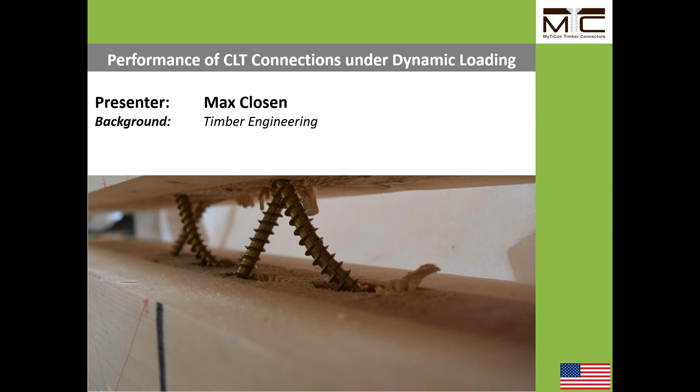Right now we are still engaged in some research projects that involve CLTs, and part of this involvement will be presented today in the webinar. So we will basically have a refresher on the performance of CLT connections under static loading, which was presented earlier in 2015. The webinar is still on our website, and the slides as well, and the design guide. So if you want to take a look at these pieces of literature later, you are welcome to join the website and take a look at those.

Today we are focusing on the performance of CLT connections under cyclic loading, after the research project at UBC here in Vancouver was completed. Lastly, we'll provide a summary of the proposed design procedures and design values.

The first campaign was on static loading. We investigated the capacities of panel-to-panel connections, such as surface spline, half-lapped, and butt joints. In the second campaign, we looked at the cyclic performance of these systems, again in panel-to-panel connections: surface spline, half-lap, butt joints, and so on.

And lastly, we will take a look at the data, the results that we obtained, some of the statistics we want to present, like drops in capacities between static and dynamic loading, how load displacement curves look, ductility estimates, capacity estimates, failure modes, and so on.

As usual, we want to put a disclaimer on the information provided here. The webinar is for informational purposes only. This is because we have only done small test series here, of 3 replicates or 6 replicates, depending on the series. However, we do strongly believe that we can use this test data to verify existing or future code provisions in CLT connection design through this small sample test series.

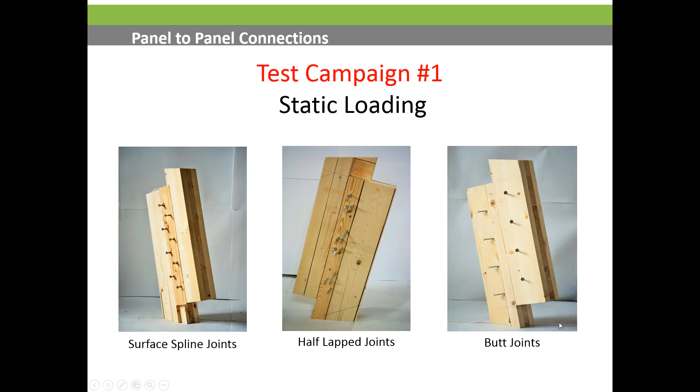Test campaign number 1, static loading. As mentioned before, we focused on surface spline joints, half-lap joints with a variety of fastener layouts, and also butt joints with a variety of fastener layouts.

Surface spline, half-lap joints, and butt joints are all listed here to the left-hand side. The label SS is basically surface spline, in a 3-ply panel with 90-degree screws. LJ is lap joints—a whole bunch of different lap joints were tested—and BJ is butt joints.

We have a variety of different angles: 90-degree angles, 45-degree angles, a combination of 45 and 90-degree screws, and also compound angles of 33 and 45 degrees in one specimen. A variety of different numbers of screws were used, ranging between 8 and 12 screws per specimen. This is basically determined by the spacing and edge distance requirements that we used for the specimen.

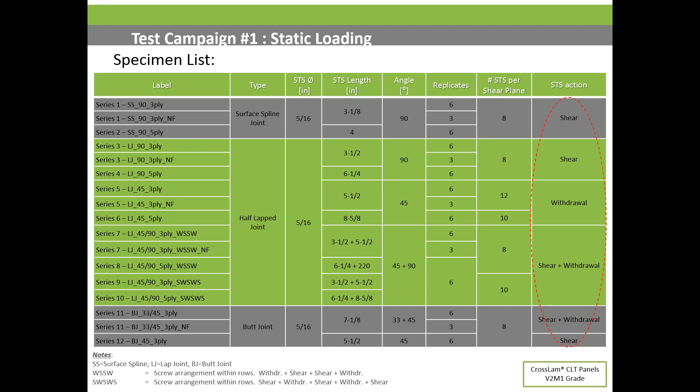We have used fasteners in shear, fasteners in withdrawal application, and interestingly, with results we'll see a little bit later, we have used fasteners in shear and withdrawal combined action. All tests were performed in cross-lam CLT panels, V2 M1 grade, from a local manufacturer here in British Columbia.

Our test setup was selected according to DIN standard 26891, which is basically an actuator pushing down onto our specimen. The specimen is at a small, about 15-degree angle, to subject the fasteners to a pure shear load. In our loading protocol, we load the connection up to 40% of its ultimate expected load, then unload the specimen to about 10% of its expected load, and then ultimately break the specimen until ultimate failure occurs.

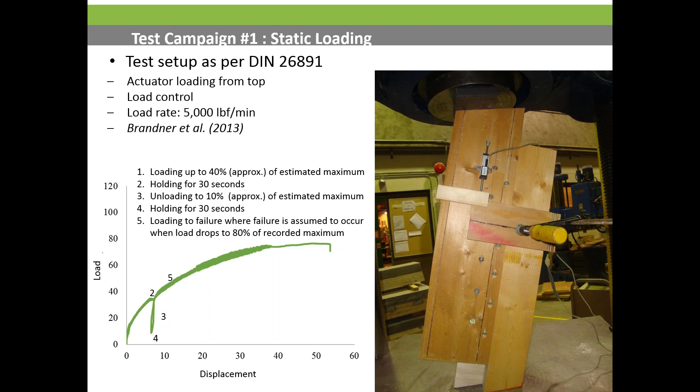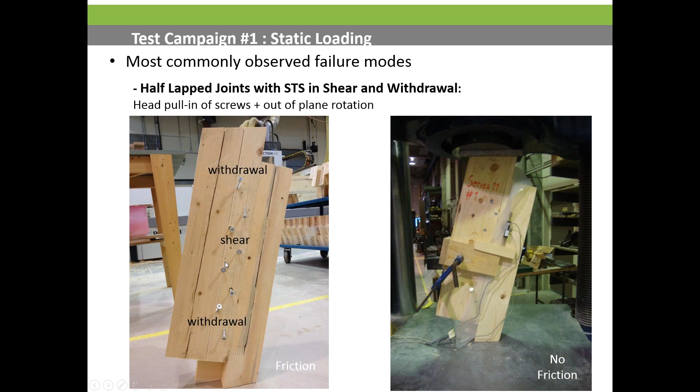For the joints where we have half-lapped panels, that was on one hand fasteners in shear, on the other hand fasteners in withdrawal. We have fasteners in withdrawal on the outside, fasteners in shear on the inside, and then again withdrawal on the outside. Failure modes that we saw here are again head push-out, head pull-in, fastener bending, splitting of the wood fiber, and out-of-plane rotation for some of the specimen.

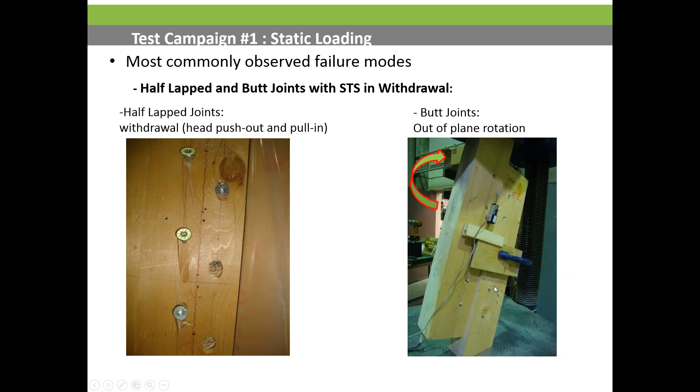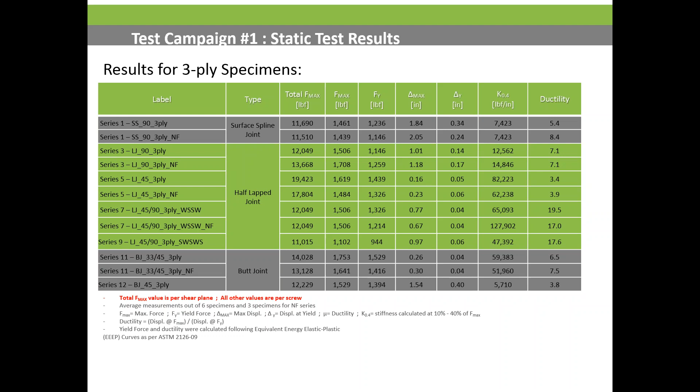In this table here, we present a summary of all test results. There is a lot of numbers presented here, which we will not go into detail now in this webinar. However, you're welcome to take a look at these slides after the webinar. I'm pretty sure these slides are going to be sent to you by email today or tomorrow if you have registered for the webinar, and you can have a look at these capacities, yield modes, ultimate displacements at yield of the fasteners, and stiffnesses and estimated ductility values of the systems.

One particular mention that we want to do is we have basically looked at connection layouts with friction, and then the NF specimen is without friction, no friction in the specimen. To do that, we basically have placed a non-friction layer or barrier in the shear plane that is meant to reduce the friction. However, what we do see as an impact here is there's no real significant impact for specimen that have friction and specimen that have no friction throughout the entire test series.

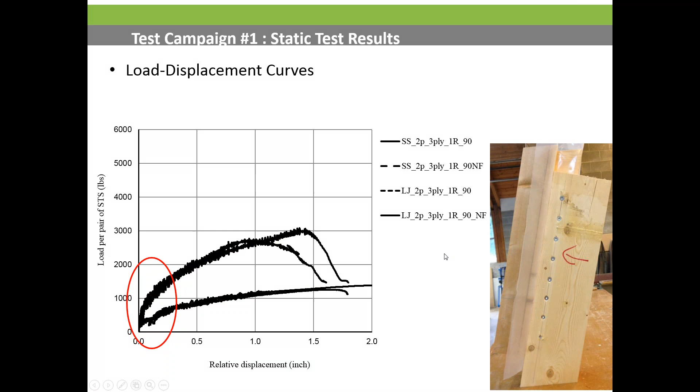The third test setup is fasteners in tension action. So we are placing the fasteners at a 45-degree angle to the force application, subjecting the fastener to a tension force. For these applications, we use fully threaded wood screws. I will explain a little bit later some more details about these fasteners.

What we see now is that we get a much stiffer connection with a lot less ductility. So compared to the 1.5 inches of ultimate displacement that we see in the static testing of the shear connection joints, we now only see about a 1/4 inch maybe of deflection or deformation in our connection system.

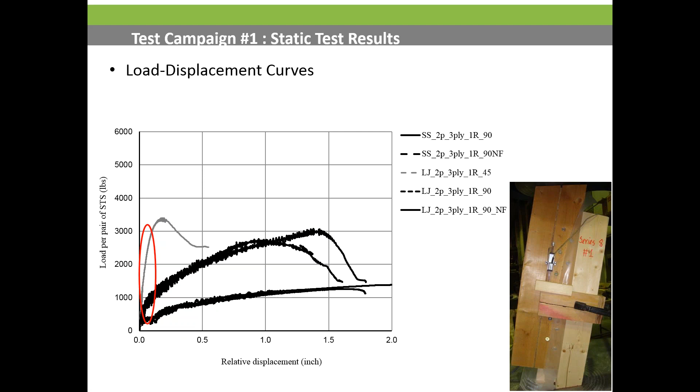We get a very linear increase in capacity and stiffness. And then as soon as the tension screws fail or start failing, we transfer the load to our shear fasteners, and the shear fasteners pick up the load and provide about 1 inch of deformation in our connection before it ultimately fails.

So again, a quick summary here. We have fasteners in shear, STS, which stands for self-tapping wood screws. Those screws do not need any pre-drilling. We have basically self-tapping wood screws in shear in the surface spline connection and the half lap joint. We have fasteners in tension - those are fully threaded screws at 45-degree angles to the shear force. And then we have fasteners in a combined action, self-tapping screws at 45 and 90 degrees in the same specimen.

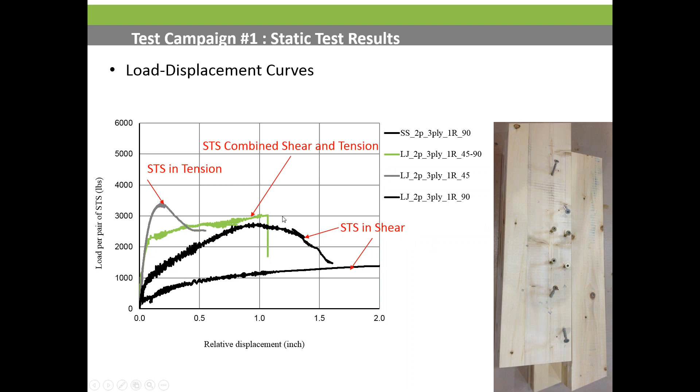In this plot, we show the difference between the three-ply panels. So this one here, and that one here, and this one are all test results from three-ply panels. CLT panels or cross-laminated timber panels come in a variety of layups, typically 3 layers, 5 layers, 9 or 12 layers, depending on the loading you have on them. With the thicker panels, you obviously get more penetration of the fasteners into it and achieve much stronger connection systems compared to the thinner panels.

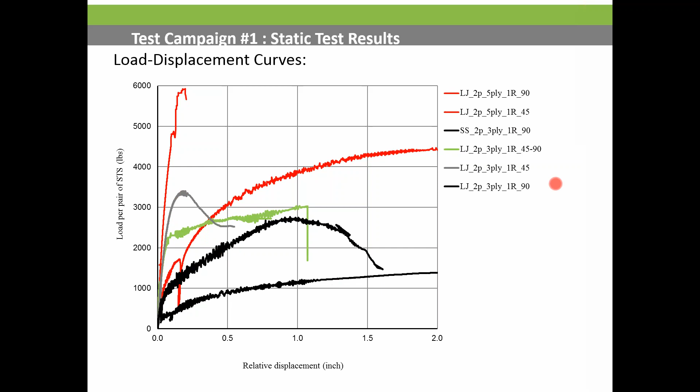We also want to take a look at the combined connection assemblies where we have fasteners in withdrawal, shear, shear, withdrawal, and fasteners in shear, withdrawal, shear, withdrawal, shear. So these connection systems give us a very high ductility, a very high stiffness, and high capacity out of the system. This seems to be the ideal solution for what we are typically planning on doing.

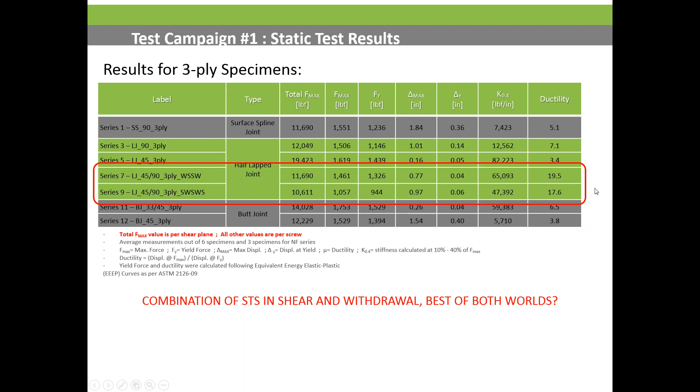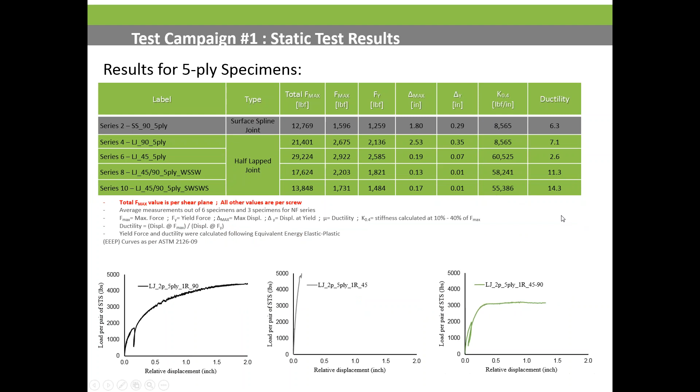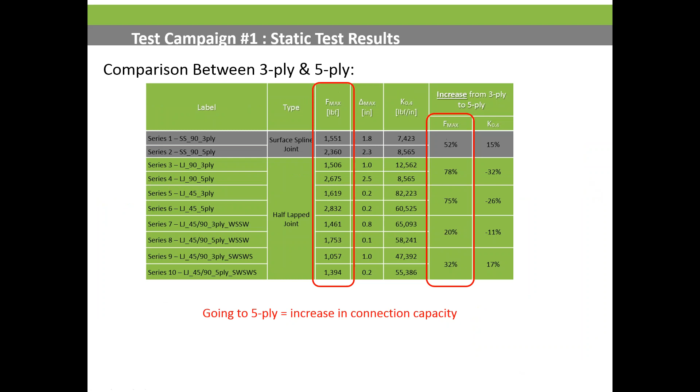A comparison between 3 and 5-ply on the maximum force level: we basically increase the capacity between 3 and 5-ply panels due to the previously mentioned facts of more embedment, more pull-out resistance, and so on of our fasteners. In terms of stiffness, we do not see an increase between 3 and 5-ply necessarily, only in the surface spline and the 45-90-degree screw layout down here.

We see increases there. In all other systems, we see a drop in stiffness. We do not quite know why this is yet 100%. We do have some mechanical models for this and ideas on why this is, however this needs to be verified before it is stated definitively.

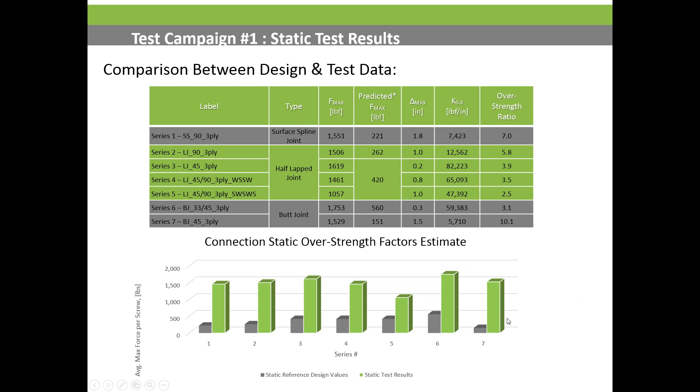Now we had a quick 10-minute review of the static loading testing on our CLT connections, and now we want to move into the cyclic loading procedures.

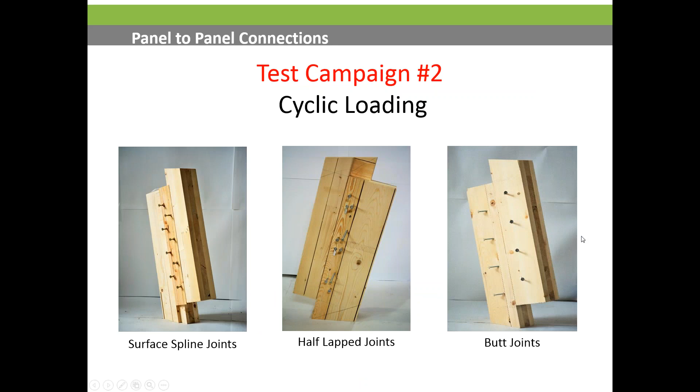We basically have used the CUREE loading procedure, which is a standard loading procedure for seismic loading in North America.

One problem with our test setup here was that we basically created the prying force in this area. When we push down, we create compression here, and the prying force goes away. However, if we pull up in this direction and apply a tension load on our connection, we do create a lateral force component here that is trying to pry the specimen apart. We did not think of this properly before we were doing the testing.

We will do verification testing on this. However, we still believe the results are very valid in what we want to show and want to do. If anything, they should be more conservative, because the fastener is subjected not only to a vertical shear load, but also to a shear load in this direction, resulting in a combined shear action in two directions.

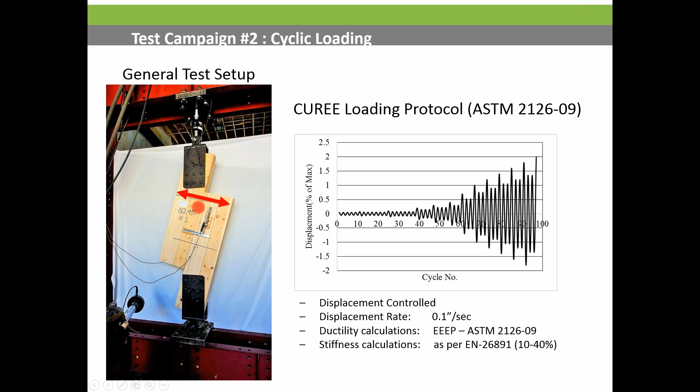We basically again tested surface spline, half lap joints, and butt joints with the previously mentioned 90 degree, 45 degree, and screw angle combinations of 45, 90, and 33, 45 degrees. Again, there was a variety of self-tapping screws per shear plane, depending on the specimen configuration and spacing and edge distance requirements. Fasteners were again subjected to plain shear forces, withdrawal forces, and combined shear and withdrawal forces in a variety of specimens. All these cyclic tests were again performed in cross-laminated panels, V2 M1 grade, the standard grade panel that we were getting from the manufacturer locally here in BC.

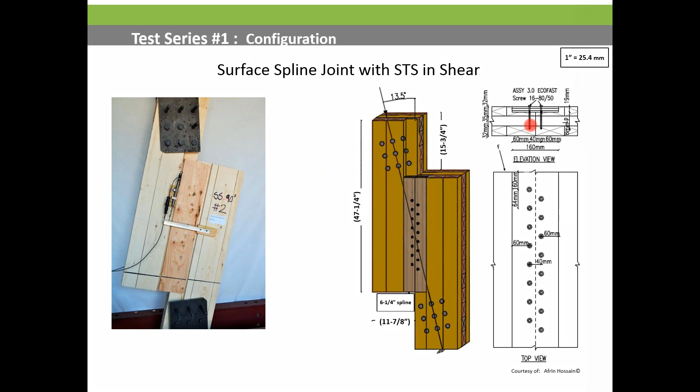Here we have a look at the first connection setup. We have a traditional surface spline joint. We are using 5/16 by 3 1/8 wood screws at 2 inches of thread length. Those screws are ICC approved and are standard fasteners for CLT connection systems.

Here we see the first cyclic load displacement curve of this specimen. We can clearly see a difference between our green cyclic curve, which is the cyclic test result for the surface spline connection with 90 degree screws. These screws are driven in perpendicular to the face of the CLT panel in the main span direction, subjected to pure dowel action or shear force.

The gray curve is always our static load displacement curve plotted against the dynamic load displacement curve. In the negative cycle, because the static loading is only in one direction, we have plotted the positive load displacement curve of the static loading into the negative area, to provide a reference between positive static loading and positive cycle, and static loading and negative cycle. So this curve is just the mirror image of the positive curve.

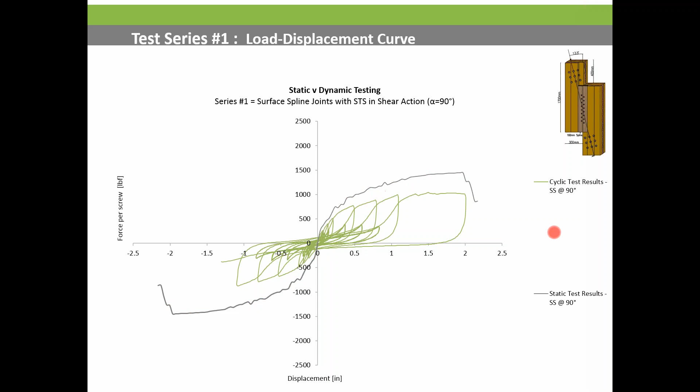Here we always plot the backbone curve, the cyclic backbone curve, shown as the red line. The backbone curve connects the tips of the maximum or ultimate load of each applied load cycle with a line, giving us the backbone curve. We can nicely see the differences between the static and dynamic curves, with a quite significant drop in capacity from static to dynamic loading. This is typically what we expect under dynamic loading, a smaller capacity due to a variety of failure modes that happen in these connections.

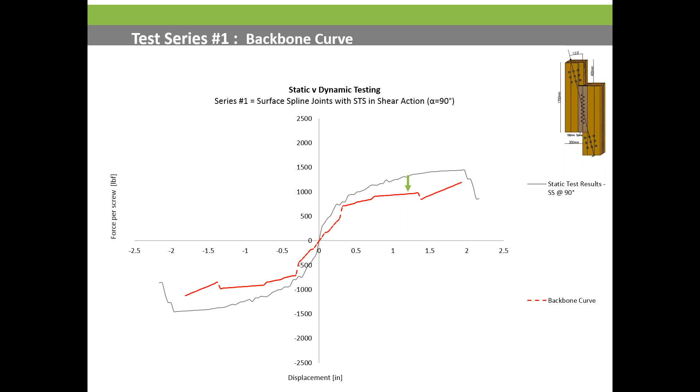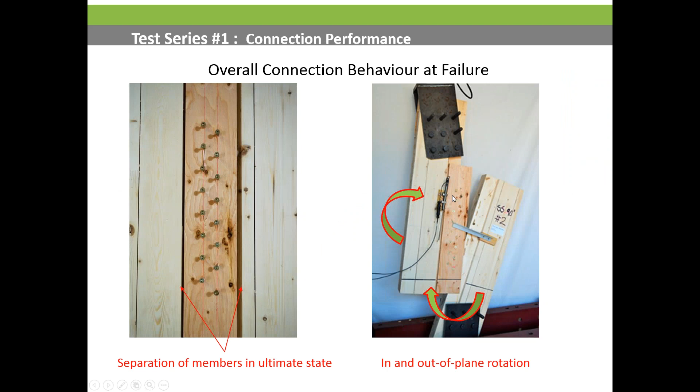Failure modes we observed include pulling apart or prying apart of the specimen due to the tension force in the tension cycle. We also saw a lot of wood crushing in these areas, and fastener breakage due to low cycle fatigue. These fasteners are case hardened to provide high bending yield strength, however they do not perform as well as mild steel would. They have typical low cycle fatigue, so if we apply 15 to 20 load cycles, bending them back and forth, they will eventually break. However, as we saw in the load displacement curves, this happens at fairly large displacements.

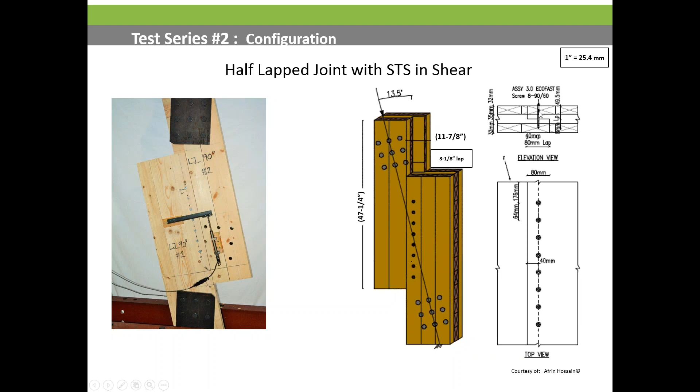The next setup we used is the half lap joint. We simply cut a half lap into the CLT panels and fasten them back together with self-tapping wood screws. We again used 5/16 by 3 and a half inch wood screws. For these systems we have about 2 and 3/8 inch of thread length, slightly extending past the shear plane, which is not ideal but suitable for this testing. This is also a standard ICC approved fastener that we use for these systems.

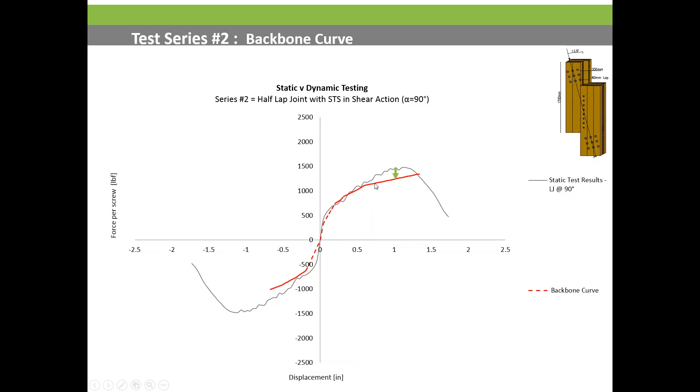The backbone curve confirms these results. We have almost equivalent performance in the positive cycle and a little bit of tapering off in the negative cycle, though the curves are very similar. In the ultimate ranges we do see a capacity drop and performance drop again between cyclic and static loading.

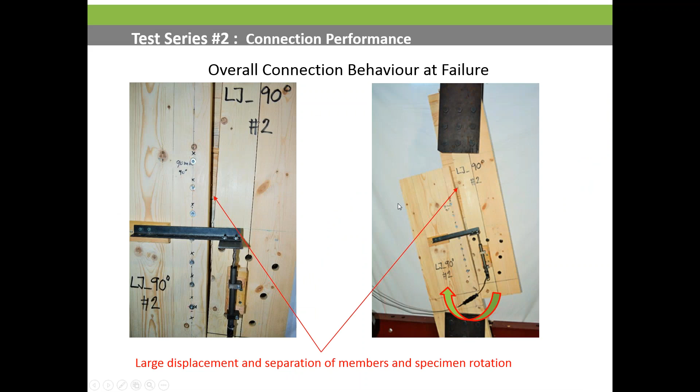In terms of failure modes, we see similar failure modes again, prying apart and moving apart of the CLT connection in the horizontal direction, due to the prying force that was created. We also see a significant amount of wood crushing, actually forming a nice cavity behind our screw. The screw was pushed from here all the way to that side, and then in the negative cycle it would need to go through that cavity back to the wood, crushing the wood fiber a little bit more, and move in the other direction again.

Interestingly, what we see on the right-hand side here, the fasteners are bending to a 45-degree angle, and then at one point they will break due to low cycle fatigue or crush the wood fiber, pull the heads up top here, and so on. Very interesting here again, the screws are bending to a 45-degree angle almost, which is one of the manufacturing requirements for European fasteners. The fasteners we used were made in Germany, so they are basically required to bend by 45 degrees without breaking.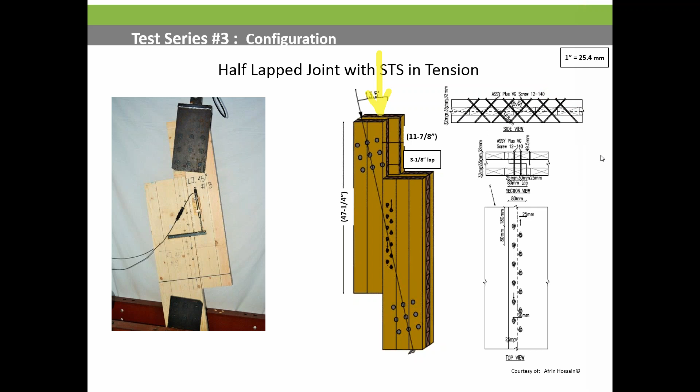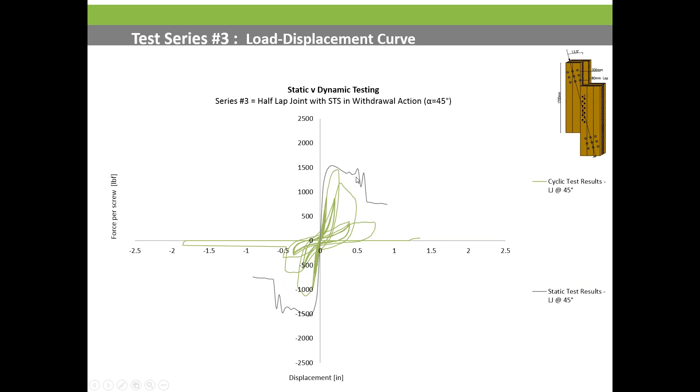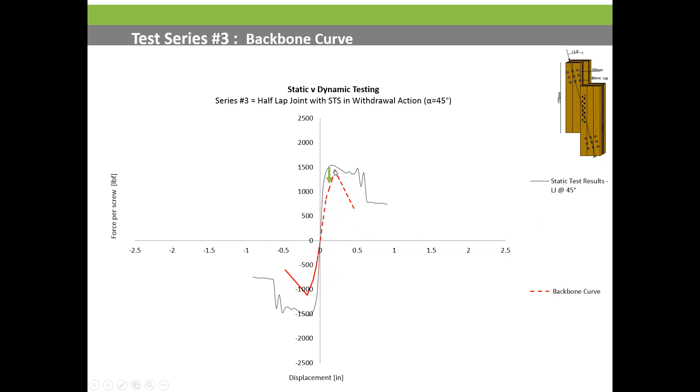The backbone curve confirms this again. We have a linear increase in static and dynamic loading here up to a certain point, and then the fasteners fail. We do again see a capacity decrease between static and dynamic loading of these systems.

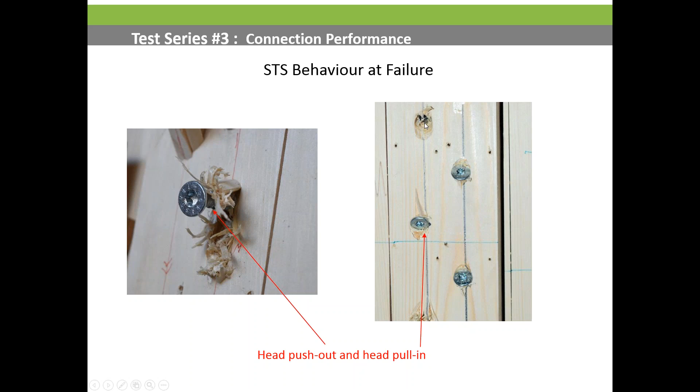In terms of failure modes, we see again prying the specimen apart. We see head push-out, head pull-in, which we nicely see in this system. We can nicely see all the wood fibers that were torn out, pushed out, and then in negative cycle being pushed in. We can also see that the screw is almost bent vertically, it was at a 45-degree angle before, so we also get fastener bending and yielding out of these failure modes. Here we see the typical failure head pull-in of the fully threaded screws, which is very often observed in these ultimate stages of the specimen.

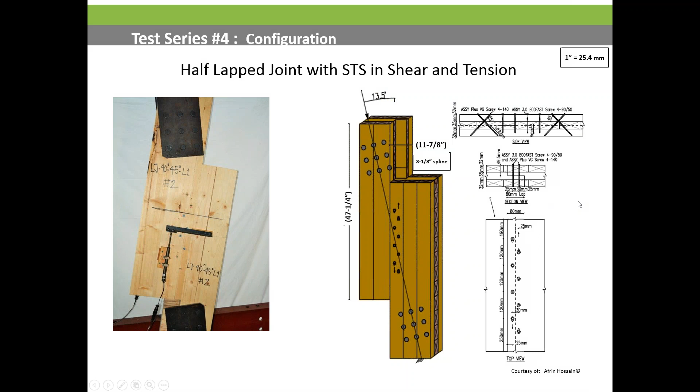The next joint is one of the more special joints where we want to combine fasteners in shear and fasteners in tension. In this setup, we have placed the tension fasteners on the outside of the specimen, towards where the load application happens from up here. The fasteners in tension were placed in this area and in that area, and then fasteners in shear were only in this particular area here. What we are hoping to get out of these test data and fastener setups is pretty much the effect of high strength, high stiffness, however with ductility, which is typically a rather hard failure mode to achieve, and only a few systems can do it.

Here we want to play a quick video for you on these test setups to see how much deformation the systems get.

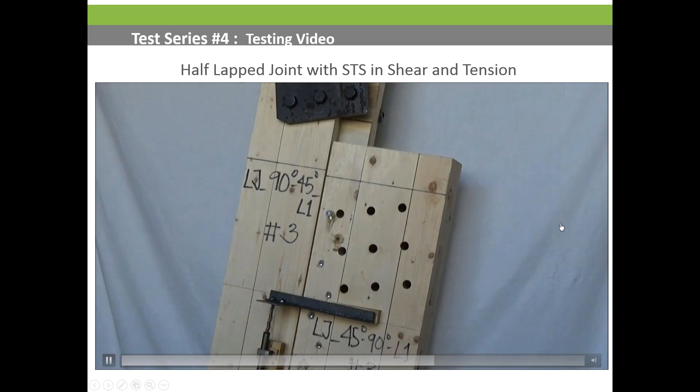I do believe you cannot hear the sound of this video, but there is lots of wood crushing sound and machinery noise, obviously, from the actuators of the test rig. We can see quite a bit of displacement in the positive cycle and then in the negative cycle. We can also see how these compression screws here are basically pushed out of the specimen now, bent over. We zoom in a little bit on this to make this clearer for you. So here we see how the screw is pushed in and pulled out in the ultimate stages of failure for the specimen.

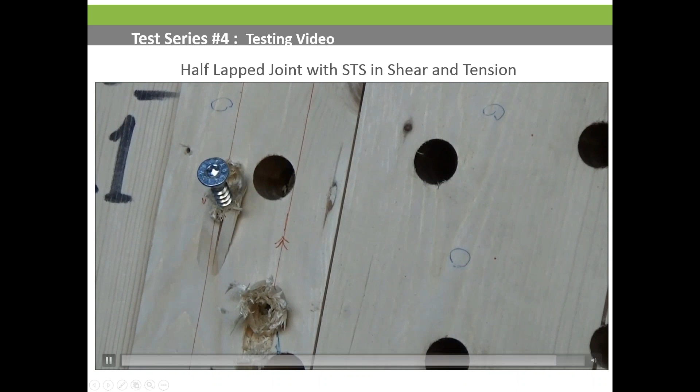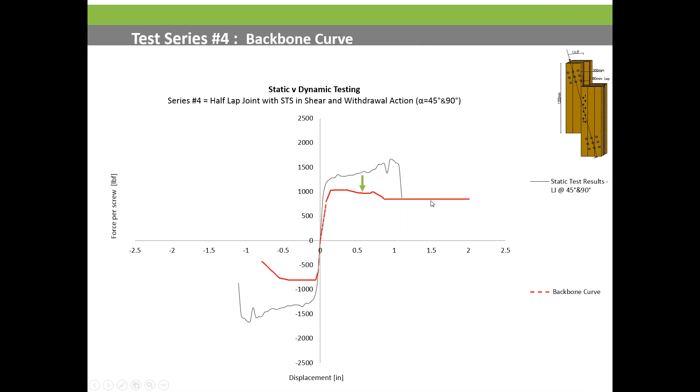The backbone curve again shows these results nicely. We do have a significant drop between the static loading curve and the dynamic backbone curve, and we see the displacement of 1.5 inches nicely.

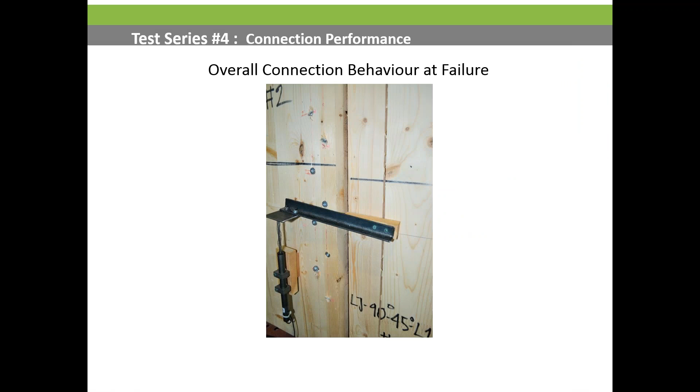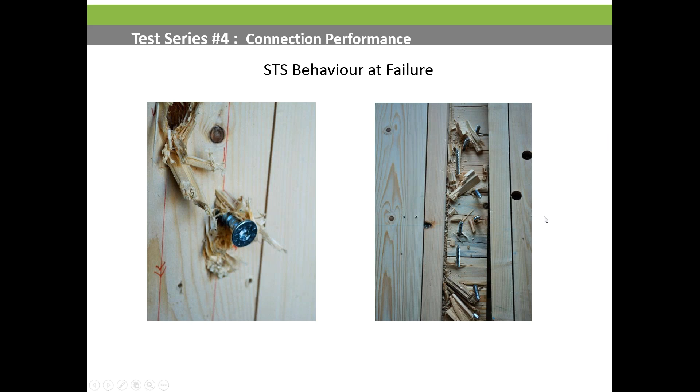The second setup that we have used for the combined fasteners, we basically have shear fasteners to the outside of the specimen. Again, remember, load application was happening in this direction. Before we had tension fasteners, so 45-degree screws in this area, and then we had shear screws in this area and tension screws in this area.

Now we have the exact opposite setup. So what we have now is we have shear fasteners here and then tension screws here, another set of shear fasteners and then tension fasteners, and then again shear fasteners down here.

Again, we wanted to see what the difference between those connections is, and as we see here in the load displacement curves, we do see a difference. The other connection system basically performed not as this one. The previous connection system had a big difference in static and dynamic loading. Here we see again a fairly similar performance in the linear ranges between static and dynamic loading.

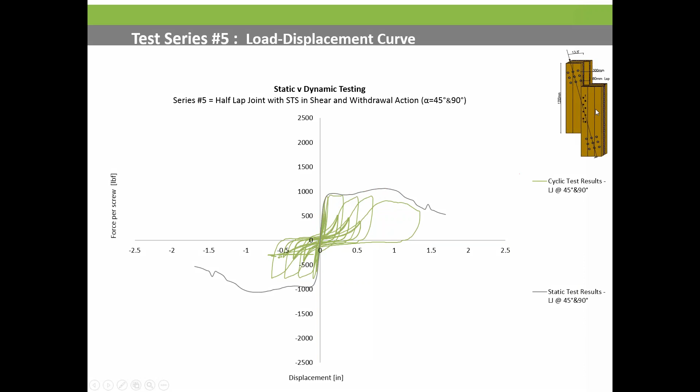This is also confirmed in the backbone curve of the cyclic testing. We do see capacity drops, however they are not as significant as we have seen here. This was the previously shown specimen, so we can clearly see capacities are in similar ranges as we have for the other system.

They are in the exact same range at around 1,000 pounds when the specimen starts failing. Similar, we have it here at around 1,000 pounds. This particular setup goes a little bit higher in ultimate force compared to this one. Ductility wise, they are probably in the same ranges between 1 and 1.5 inches of displacement before failure is observed.

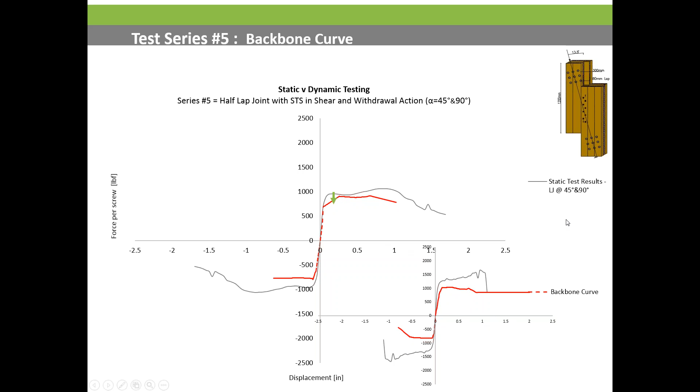Ultimately, failure modes here look again very much the same compared to what we had before. We get push in and pull out of the fasteners, lots of wood fiber crushing and being pushed out for the tension and compression screws. And again, we see the prying force that is acting and prying the specimen apart.

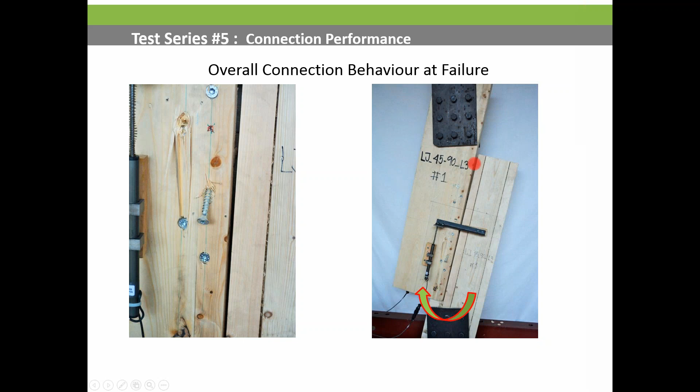The next specimen here, interestingly, has 45 and 33 degree screw-in angles. So we have driven in the fastener on a compound angle, with load application again from the top, and the fastener is driven in like this and like that, and the ones at the bottom up from this direction here, and this was driven down there to create tension and compression screws again and tension loads on the tension fasteners.

Another advantage that we see here with the system is that we can basically transfer out of plane forces. So if we have panel joints that are not bearing on a beam, we would be able to transfer loads in the vertical direction, gravity loads for instance, because the fasteners are at an angle to this particular force, and that subjects the fastener to a tension force in this direction too, and we are able to transfer loads out of the plane.

Load displacement curve of this specimen looks as we see here. We see a very linear increase of stiffness up to capacity up to around 1,000 pounds. I would say this is a very predictable fashion and performance for all the connection layouts that have tension screws in them. They're always very linear to around 1,000 pounds, which is in this area, and then they start to taper off.

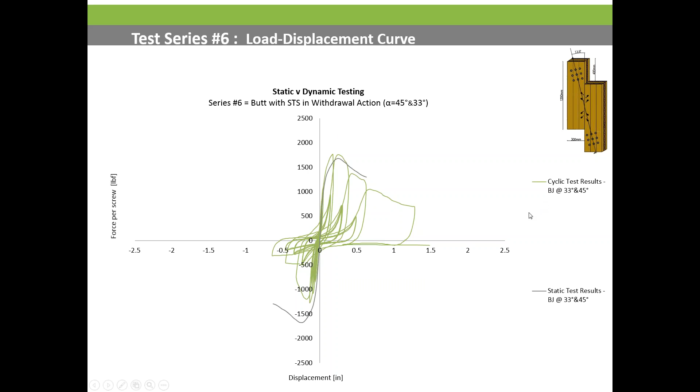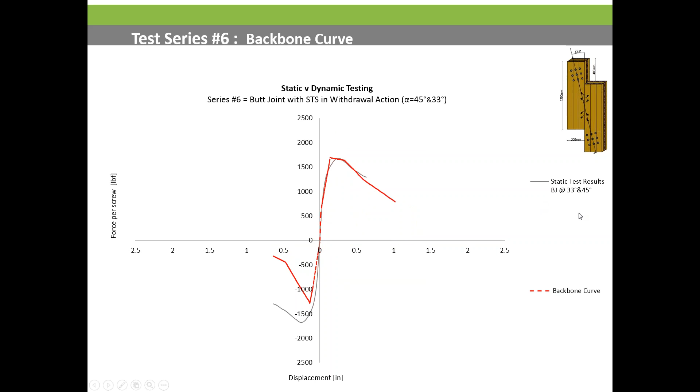Some of the load cycles here in the dynamic loading actually exceeded the static capacity, which is definitely possible, however not common. Looking at the backbone curve, we see similar fashions here. Again, it is very equivalent to the static loading curve. So for this particular connection setup, the static and dynamic loading does not seem to have an impact on it.

Ultimately, in terms of failure modes, we see again prying apart of the specimen, rotation out of plane and in plane, and lots of yielding of the fasteners in the ultimate stages. What we see in this area, we basically have a screw driven in that way, and then it has bent.

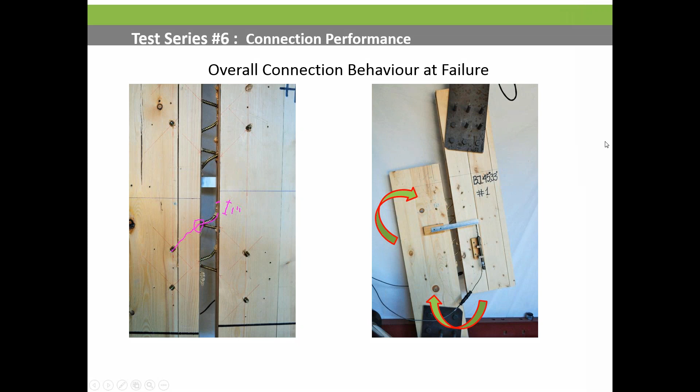It bent maybe 30 or even 45 degrees, and yielded in this area. What we see here, initially it was driven in here, and it basically pulled out about an inch out of the wood fiber in this direction, which ultimately led to the failure mode here. We also see failure modes such as head pull-in and head push-out.

What we see here, those compression screws are basically pushed out, and again they have bent over at almost a 45 degree angle from their original position. Overall, this connection exhibits a reasonable amount of ductility and stiffness, because we consider this a very stiff and rigid connection, and we still get about half an inch to three-quarters of an inch displacement out of the system.

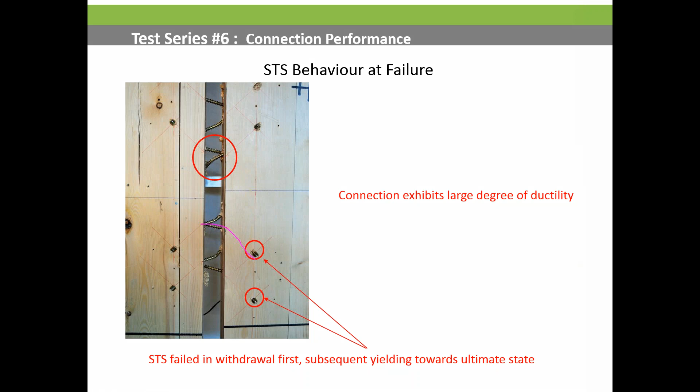The last connection setup that we have used is a plain and simple butt joint. We see a variety of advantages for this system. First of all, in this area, we do not need to do any fancy machining. We just need to cut a square edge and then butt joint the panel in that direction.

We may also be able to transfer gravity loads on these systems. It will be rather small, but there is the potential of transferring gravity loads in this direction, and then also shear loads in this direction. The fasteners are again fully threaded wood screws, 5/16 by 5.5 inches, driven into that 3-ply cross-laminated panel.

Load displacement curves of this look like we see here. The static curve performs similar to the dynamic curve, where the dynamic curve actually exceeds the capacity of the static load displacement curves, which is not something we commonly see. It is definitely the case in the positive load cycle. In the negative load cycle, if we mirror the positive load cycle, we see a little bit of dynamic loading decrease, which is also very normal.

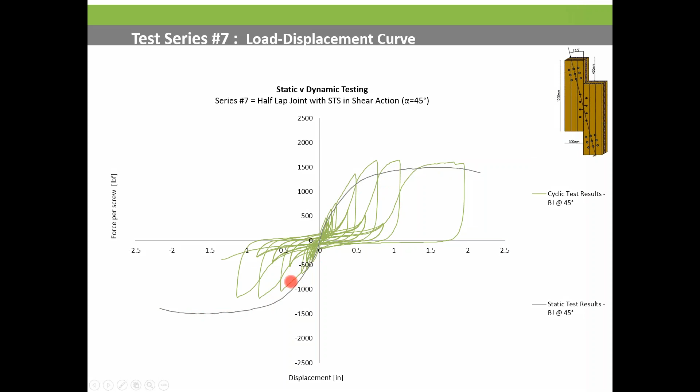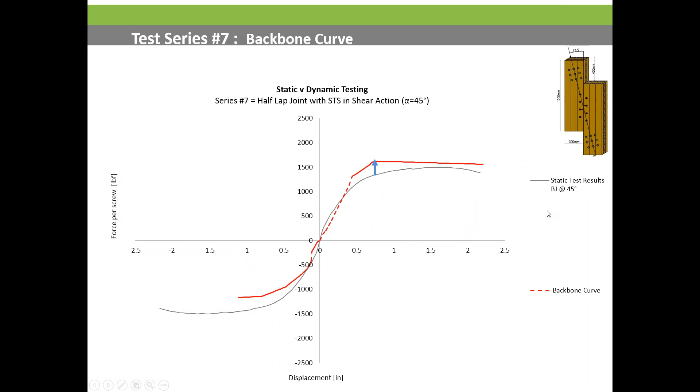Looking at the backbone curve, we do see the capacity gain in our system. So again, cyclic capacity of this particular setup is stronger than the static performance of the system in our particular test setup.

Ultimately, the failure modes are again prying apart of the specimen. What we see here was about 1/2 to 3/4 inch of displacement or separation of the specimen. Displacement in this area was actually around 1 inch or 3/4 inch as well. And then we nicely see fastener yielding, bending of the fastener, and crushing of the wood fiber respectively.

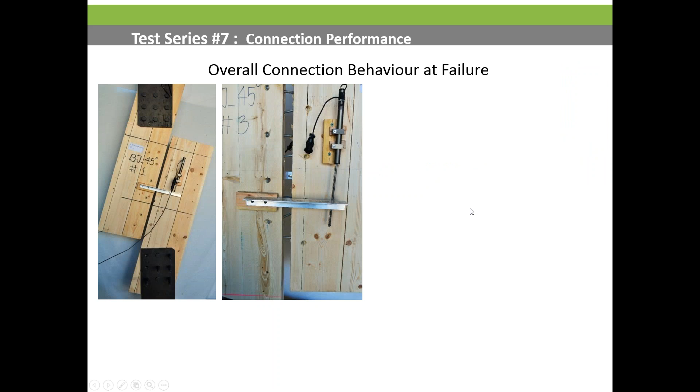Interestingly, we are pushing these fasteners up and down in this direction. That subjects our fasteners, which are driven in plane, to shear action. This way, as soon as the connection deforms, we can see how the connector deforms as well. So the connector was driven in originally like this, and then it tapers off at a 45-degree angle or more during the ultimate stages of testing.

When we look at the mechanics here, when we apply a vertical shear force and have a fastener driven in or deformed at an angle to the grain, we again subject the fastener to tension or compression loading, which may be one of the reasons why these systems have so much ductility and still maintain a lot of capacity.

We need to keep in mind, if we analyze this, that fasteners in withdrawal action are always much stronger and stiffer than fasteners in shear action. A simple example is that when you put a wood screw into a piece of wood, it's easy to bend it over, but it is rather hard to pull it out. For these engineered fasteners at 1/4 inch up to 1/2 inch or even 9/16 inch diameter, you can imagine you get very significant pull-out forces and pull-out capacities for these systems.

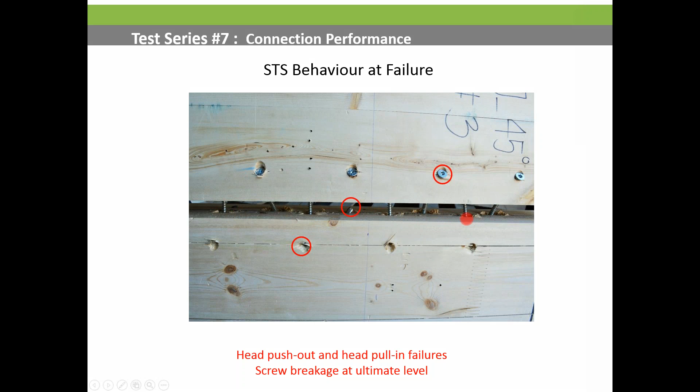We also get some head pull-in and push-out, which is due to the tension forces. We do see a lot of wood crushing in the center layer throughout the entire connection series, which is an indicator for a potential energy dissipation in the system.

Now, in the next few slides, we want to present a summary of all the load displacement curves with surface splines, half-lap joints, and so on. The first backbone curve we see here is for the cyclic loading of a surface spline. Against this, we have plotted the performance of a surface spline in a 3-ply panel with 90-degree shear screws.

Against that, we have now plotted the half-lap joint with fasteners in 45-degree arrangement, so fasteners in tension and compression. We again see the quite significant stiffness difference here and a steep load drop, so that indicates a rather brittle failure mode. And now we go to the specimen where we have combined action of 45 and 90-degree screws.

We do see, again, stiffness increase very linearly up to a yield point pretty much, and then we have ductility out of our shear connections or shear fasteners. The other system with this similar setup, fasteners in shear and tension, performed a little bit weaker. The kink is a little bit earlier here, so we get yielding of the fasteners a little bit earlier, a little bit less ductility too, and also less ultimate capacity.

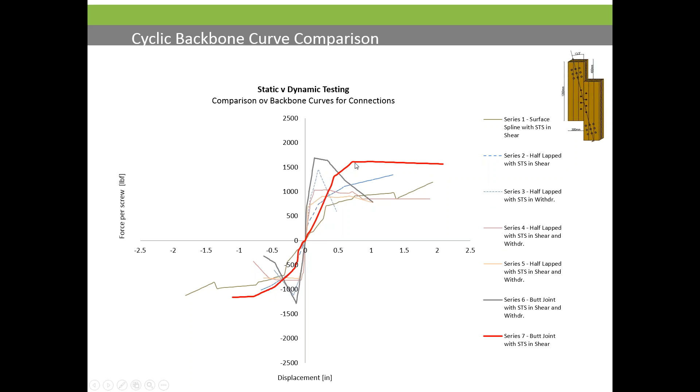Now, in the last 10 minutes of this presentation, we want to go into the results and statistics that we have obtained from our testing.

So the first few tables will look at the ultimate data obtained in a fashion that we present the maximum total force, the maximum force per connector. So this is basically the force per screw. This is the force per connection. If we had 8 screws in this particular setup, this value times 8 would give you the total maximum force. We have also determined the yield force.

The yield force of the system is basically what you want to verify against your design procedures you're designing. If you follow the Johansen yield theory at the yield point, I believe if we look at the predicted load, this should be at around 500 pounds, somewhere in that range. And here we actually see yielding of the system at 900 pounds.

We have also recorded the maximum displacement, the displacement at the yield load, and then we have determined the ductility value out of these systems, and give you stiffnesses at the load range between 10 and 90%, and the load range between 10 and 40%.

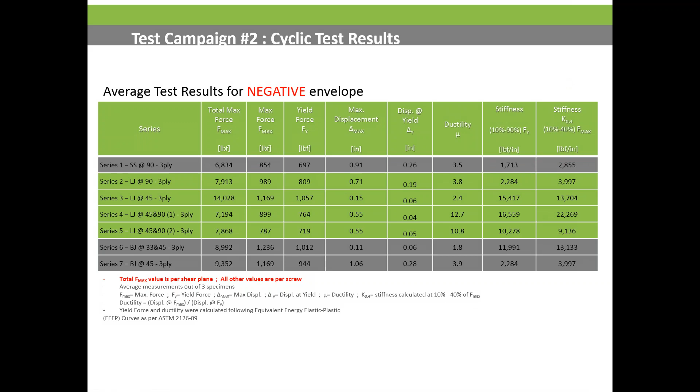Here we have the negative load cycle. We present the same results. Positive and negative load cycle had different capacities, as we saw in the load displacement curves already. This is what you see in those tables here to verify which load cycle you want to take for design.

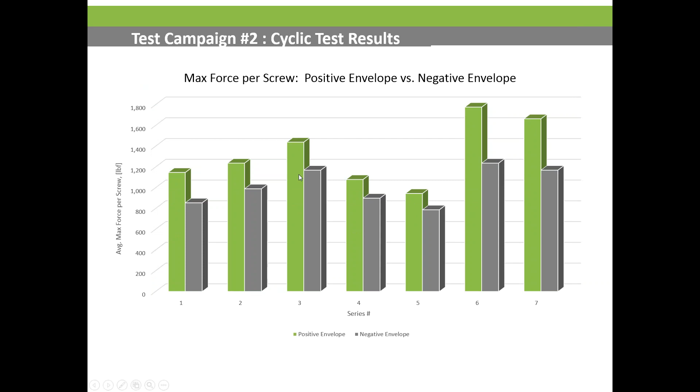In a more graphical fashion, we present differences here. Again, positive and negative load cycle had different capacities. The green bars are our positive load cycle and the gray bars are our negative load cycle. We can continuously see that all negative load cycles had lower capacities compared to the positive load cycles.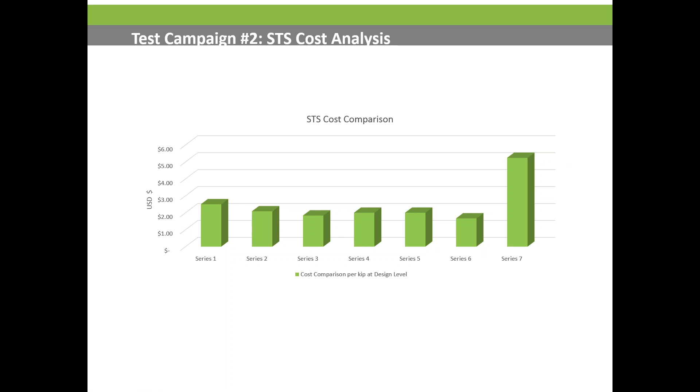Comparison between static and cyclic performances. For the cyclic performance, we used CUREE loading procedures. For the static loading design, we used a procedure where we load the specimen up, unload it, and then keep loading it until it ultimately breaks.

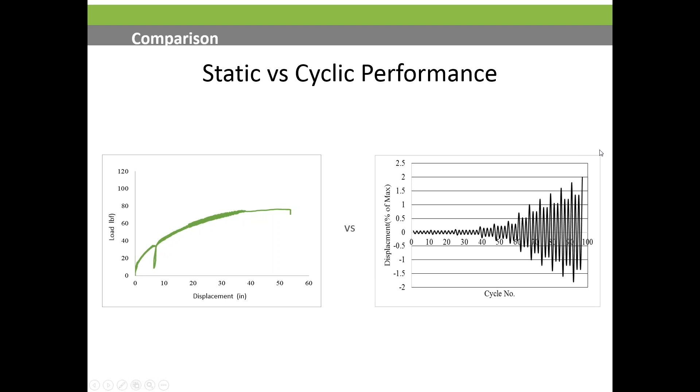In terms of capacities, we see a reduction between static and cyclic loading, which is pretty much what we expect. We see a capacity drop of around 30% all the way down to 7% for the butt joint. For the yield point, we see similar drops between 30% and 17% or 8% in this case. These drops are as expected, and there's nothing surprising since cyclic loading will always cause lower capacities and lower performing connection systems.

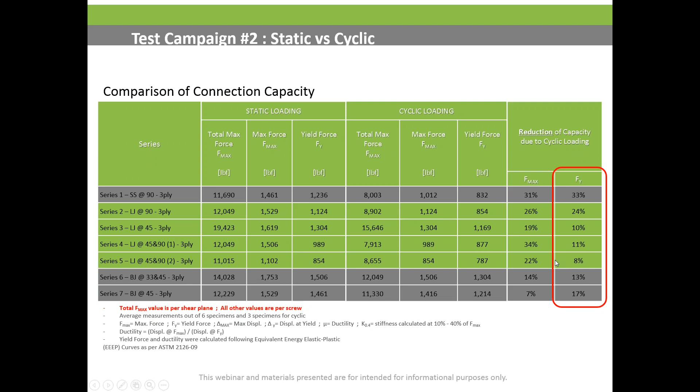Performance comparison: under performance, we compare ductility and stiffness. Ultimately, we lose ductility in the cyclic testing, some specimens more significantly than others, and we also get a stiffness drop in our system under cyclic loading.

Now we want to compare what I mentioned already in the cost analysis. We basically have our design load, our predicted maximum force per fastener using NDS design procedures or the American CLT design handbook procedures, and then we compare this against our test values.

We see overstrength factors all the way up to 9 for the butt joint. Some of the design procedures for the butt joint yield very conservative results, but not the most cost-efficient results. Realistically, we are looking at overstrength factors of 2 to 4. Somewhere in that range, I would consider these design procedures reasonable and cost competitive.

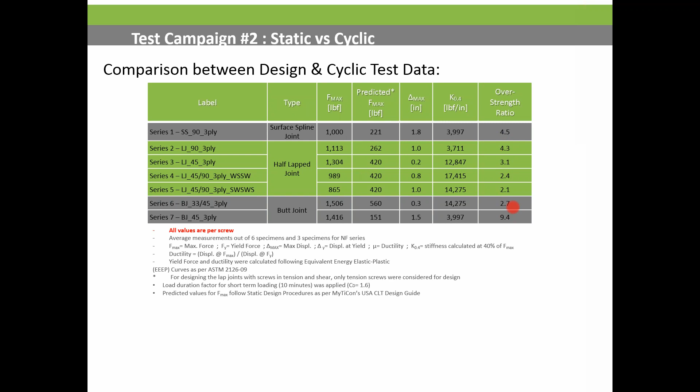In a more graphical fashion, this looks like this. Again, the butt joint is a bit of an outlier here—we are very conservative with our assumptions, so we may need to adjust our design factors and capacities for this particular connection setup based on this test data. We can say our design capacity times 2 still gives us an overstrength factor of 4, which is reasonable. All other connection systems provide us with a reasonable amount of overstrength factors.

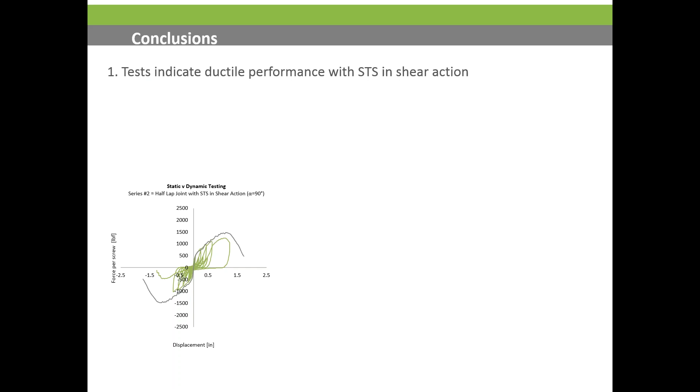We do get very moderate performance with self-tapping screws in combined action. Combined action is 45 and 90-degree screws in one setup. We have a large amount of ductility and a very predictable performance of the system in the linear ranges and beginning early cycles of the testing.

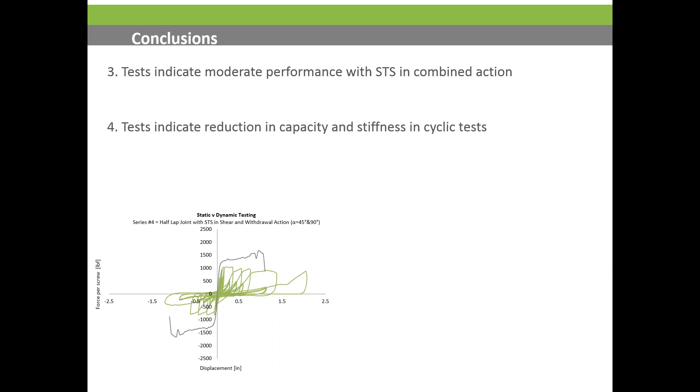We do also see that all tests indicate a capacity and stiffness reduction basically in the cyclic loading. There are some exceptions, of course. However, the general trend is that we have a capacity and stiffness degradation in our cyclic testing.

The butt joints, as we mentioned, exhibit a very nice performance. We almost get 2 inches of displacement while we are maintaining our load. In the linear design ranges where we actually design now is probably somewhere here between 200 and 300 pounds in design load per fastener. And we can see that the fasteners can take about 1,500 pounds per screw in that particular setup. So we would need to adjust the design procedure here again to get into more cost competitive areas somewhere here or even higher up.

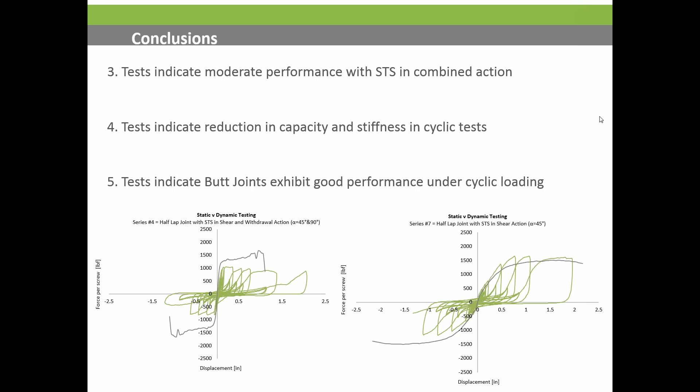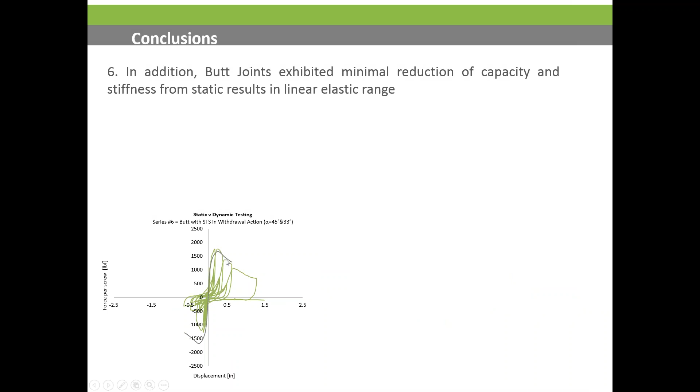In addition, we saw that our butt joints with fasteners at 45 and 33 degree arrangements, so fasteners in tension action, do exhibit high stiffness, high capacity with somewhat of ductility. I'm saying somewhat because the connection is considered very stiff, but still exhibits around half an inch of displacement before we ultimately fail the system.

All the testing basically confirms the conservative nature of the design procedures that we have attempted to use for this, from the American Wood Council CLT design book, the Canadian CLT handbook, or NDS or CSA standards, depending on which country you're designing in, the United States or Canada. So we do have conservative results for all these test setups and design proposals.

Some of the connections are, however, a little bit too conservative overall, and then we lose cost efficiency on the system, which we of course are trying to avoid, to be more aggressive on our pricing with timber structures and more competitive in the market. A quick outlook, what we will do in the near future.

We could not get any conclusive results on the group action factors for these tests, so we used 8 or 12 or 10 fasteners per system. However, there was no conclusive result on the group action factors of it. Some specimens showed that there are group effects, some specimens showed that there are no group effects, and we will have to do a little bit more testing on this.

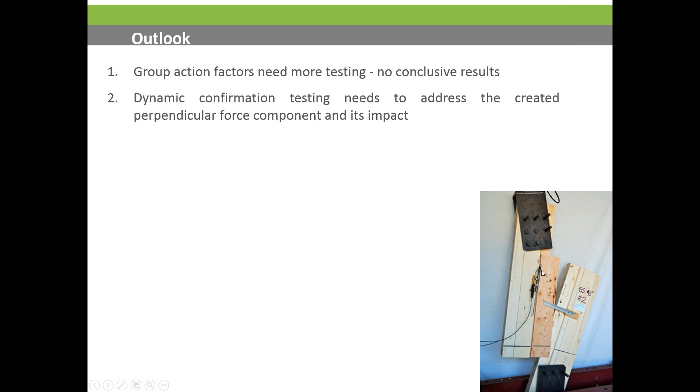Dynamic loading needs to be confirmed. Remember, we did create this horizontal prying force here in our load cycle when we are pulling up. So we need to confirm this testing with a small test series and see if we can maintain the results that we have. However, again, we do believe that the results that we have here are usable and presentable and are a very good verification for the design procedures we have.

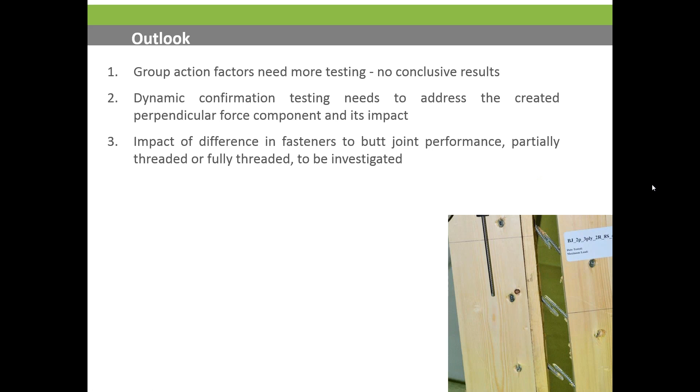The impact of difference for the 45-degree butt joint needs to be investigated. We need to figure out the difference between partially and fully threaded screws. In this particular test setup, we have used fully threaded screws, which exhibit a tension force in this direction here, as we explained earlier. So we get high capacities out of these systems. However, we are not allowed to use this by the design procedures that we have attempted to use for this verification. So we might need to do some adjustments or potentially look into European design equations that do allow you to use this so-called rope effect on the fasteners.

We will also do some medium scale testing with 4x8 cross-laminated timber panels, for instance, shear wall applications or diaphragm applications. The small specimens that we have used now are about 4 feet or 6 feet long overall, and we only have an area of 2 feet where we actually have the connection. So we are attempting now to do more full-scale testing in 4x8 CLT panels and see what the system factors are and if we can determine some reasonable design values for shear walls.

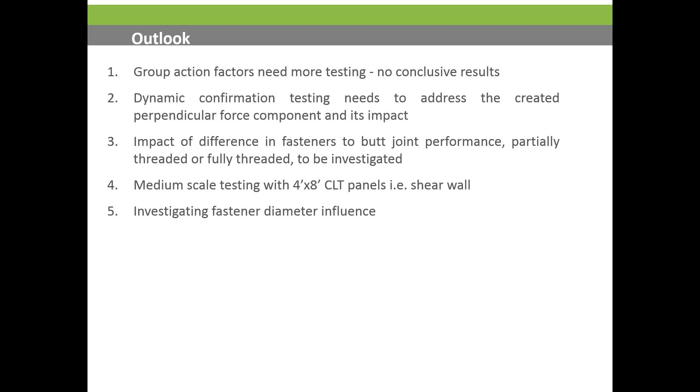Also, we further need to investigate the fastener diameter and the influence that comes with that. Self-tapping wood screws are available in 1/4 inch, 5/16 inch, 3/8 inch, 1/2 inch, and also 9/16 inch diameters. So there's very big fastener diameter differences, and it might be most cost competitive to use a 5/16 inch fastener or 1/2 inch fastener, depending on how the capacities are. However, we can already confirm that you would need to drive in a lot less 1/2 inch fasteners than you would 1/4 inch fasteners, and that might reduce installation time on site and overall increase cost competitiveness.